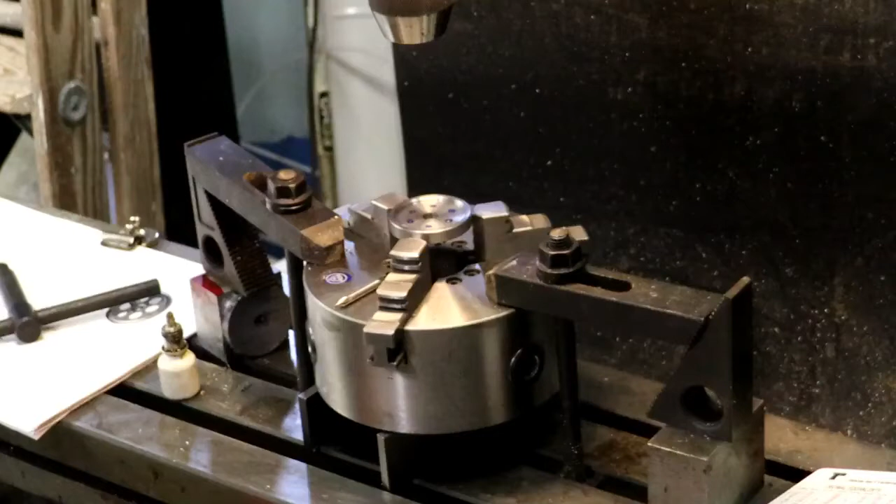Okay, been a while since I've been out here. Haven't been feeling really all that well. I have a doctor's appointment this afternoon to hopefully get my meds straightened out.

But anyway, working on the flywheel. And I already went through and marked, with a center drill, the holes that I'm going to be drilling in there, the hole pattern. But I'm going to show you on the DRO.

Okay. So I've already typed it in, so it should be in there yet. So I'll hit the hole pattern down here. And the first thing it's asking is the center of that hole pattern, which is 0 where we're at. So we hit it again. Oops. Hit the arrow down key.

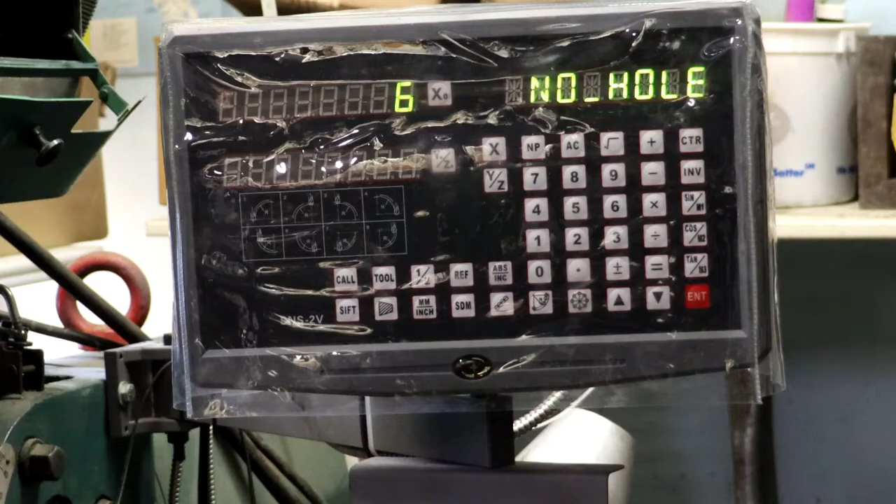And the diameter of the hole circle. And the diameter of the hole circle is 1.050 inch, which I have in there. And number of holes, 6 holes. And the starting angle, I'm just going to go 0.

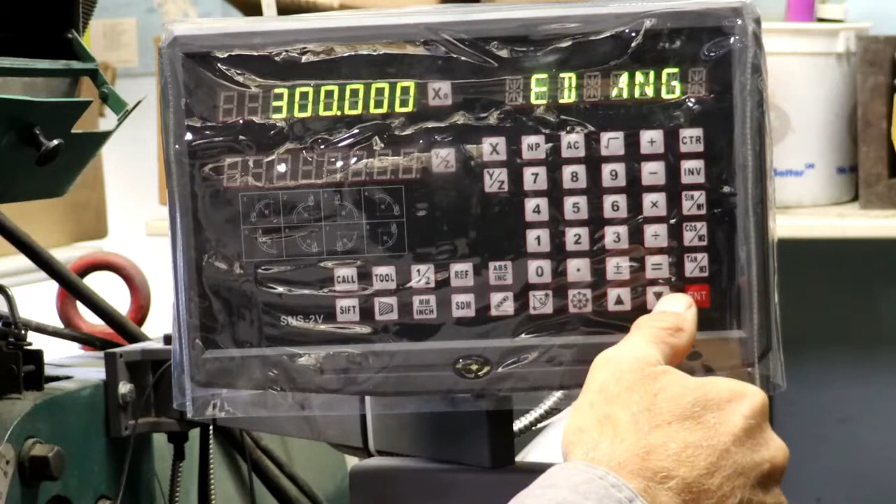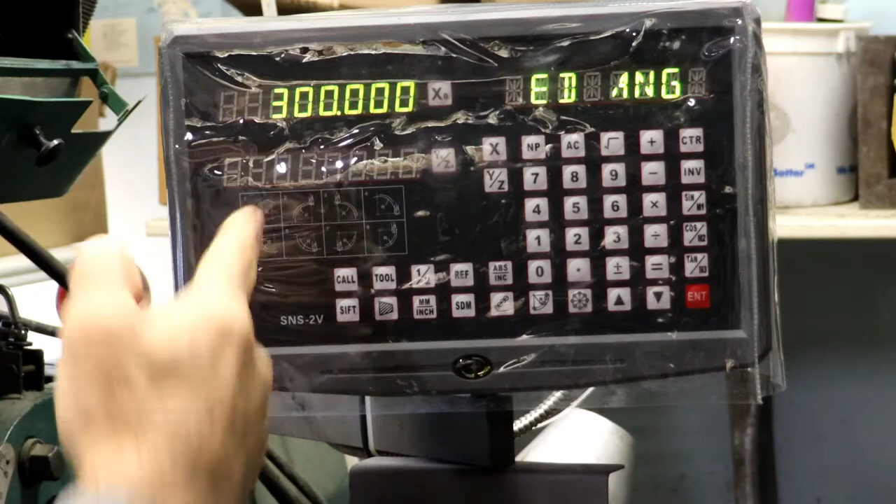And ending angle, you would take 6 holes, so that would be 60 degrees. So 360 subtract 60 degrees, because that's going to be our last hole. It'd be 300. Okay, and there's the number 1 hole.

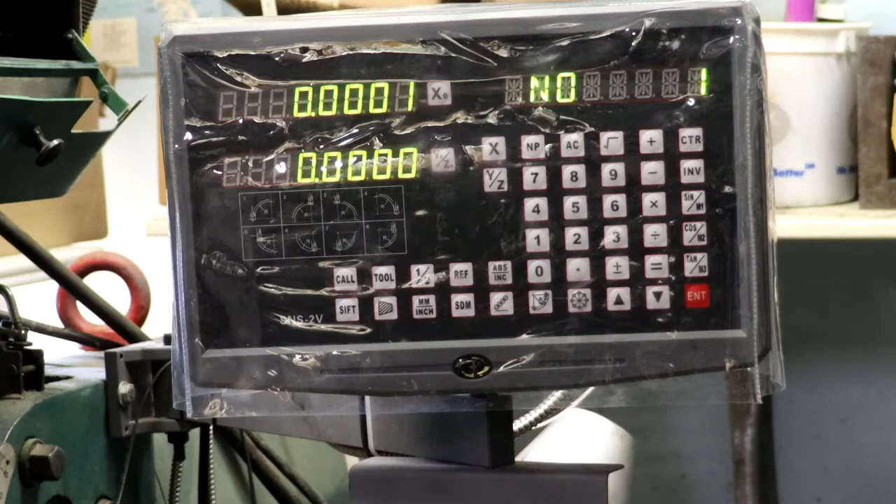We crank our X over to 525 thousandths. So what we do is we crank it over back to 0 here each time. So we'll crank that over to 0. Or close to. I see I bumped my Y. So I'll put my Y back to 0. Lock my knee, or lock my cross slide. Okay, so we're ready to drill the first hole.

And I turned my autofocus off. I'm just trying to focus it by hand.

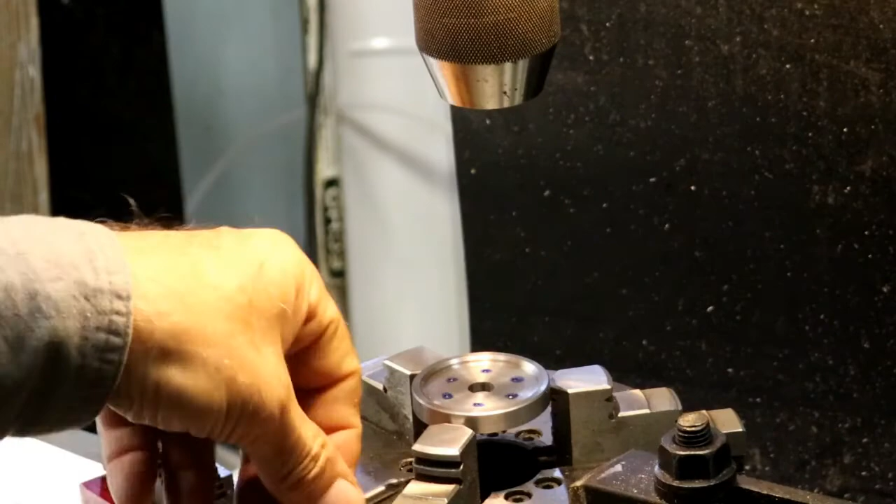And I'm going to drill a 437 diameter hole. I'm going to go in there with the center drill first and center drill that a little deeper. Maybe I gotta turn my quill stop down. And I'm going to double drill these. I want a 437, but I'm going to drill it probably a 1/4 inch first. We'll go ahead and drill that a 1/4 inch first.

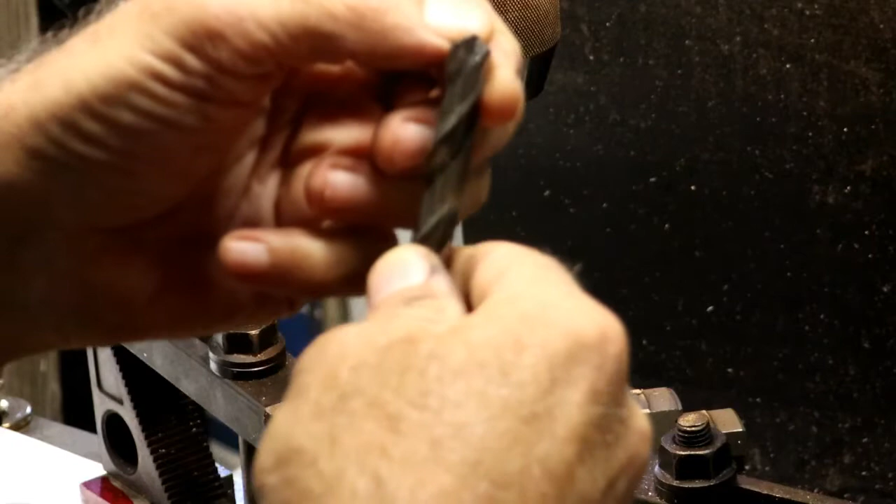Now one of these holes is going to be a 312, which will be the last hole. So now I want a 437 diameter. Seven-sixteenths drill, and guess what? I think I should sharpen that. I'm gonna quick sharpen that. A little dull. I'm gonna just hand sharpen it here, as quick as my grinder gets going.

Now I want to check it before I, and I don't think I went far enough. Need to go more. Dull. That corner of it broke down pretty good. Margin.

Okay, I think I'm going to shift it along here. I don't want to push the drill too hard. You'll see one flute is cutting a little bit more than the other.

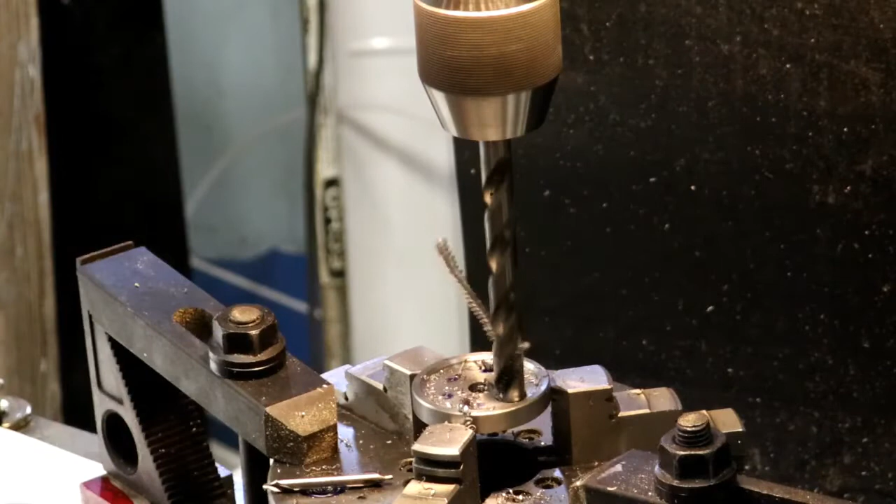And that's what I was checking with the scale, is the lip length on there, and if they're not both the same length, obviously the one that's longer is gonna cut a little more. But it's okay, we got through it, and yeah, we'll go to hole number 2.

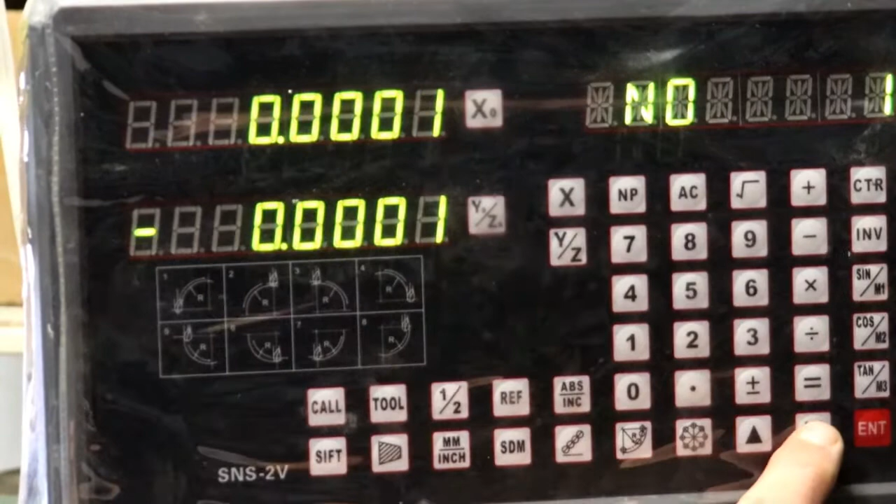So we'll go up under the readout here again, and we hit the down arrow. If I can reach it here. And then see the numbers changed. Now we got to put those back on 0. So we get down here.

This is kind of the first time that I've tried to just focus it myself without using autofocus. Hopefully I'm doing a decent job.

Alright, so Y we have to move it out, or in I should say, to 0, and then we got to move over 262. Right there. Shift back to high and do the next hole.

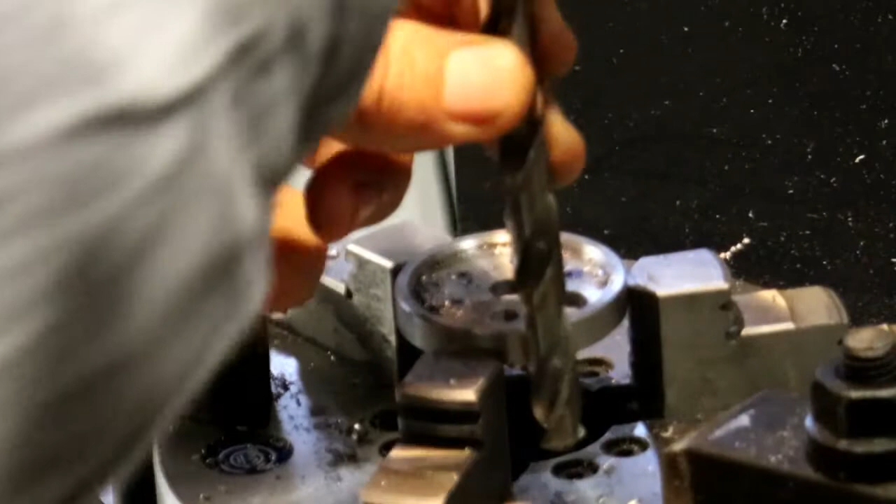And shift to low. My half-inch countersink would fit in here. Be nice if I could get a nice countersink on those. Let me check here once and see. I think I got it. I think I have one that's about a half-inch. No, I don't. I got one that's 5/8, which I don't think would fit in there.

All right, so I'll push the down arrow over here to go to the next hole. .524. Y does not move. Just move over on X. Pull my readout over here. Right there. And center drill. Then we'll shift to high. Quarter-inch drill. .437 drill. Shift to low.

And we'll push the button again, the down arrow to get to hole number 4. I've got to go 262 on X. And 454 on Y. Yep. Might help if I put that center drill in, clamping on all 3 jaws instead of 2.

I think the last time where I left off, I hadn't trepanned these out, but what I did was basically loaded it like this and trepanned the middle of it out on the lathe, so both top and bottom look the same.

I haven't been out here in a while. I started taking a double dose of my medicine. I'm hoping the doctor won't chew me out for it. I couldn't get the nerve pain under control. I have trigeminal neuralgia. Really, I'll tell you what, nerve pain in your head. You can't touch anything on your head, on your face, anywhere on your head. It sends you into a major pain episode. Puts you on your knees. Anyway, it does me. And then with the double dose of medicine, I'm kind of a little dizzy and shaky right now even.

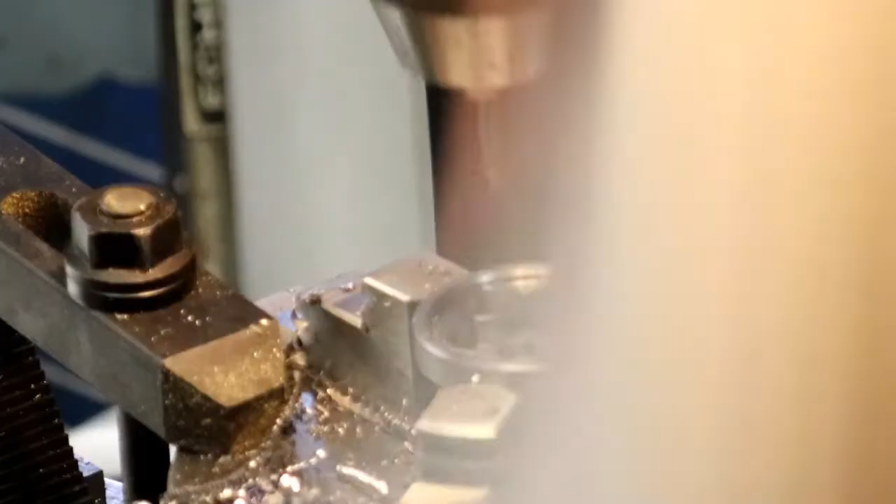All right, let's go to the next hole. Enough gabbing about that. All right, so 262 back on X. Oh, I got to move my Y. 455. See what I mean? That medicine does things to you. There we go. And then this will be the last 437 hole.

Next hole will be smaller, and that's to help balance out the motor, to balance it a little bit. Hopefully I got enough material there. If I don't have enough material there to balance the motor out, I can go back and open these up a little bit more. The Stirling engines have to be pretty well balanced, and also no friction. So I'm gonna be putting bearings in everywhere, and hopefully I can get it running.

Okay, that's the last one this size. The next one is a 5/16. So let's go to the next hole. Over 525. And my Y stays the same. And I'll double drill that also. I'm going to go with a 1/4 inch first.

And then I'll get a 5/16 drill, which is turned upside down and needs to be sharpened. It don't look too bad. I'm going to try it. Nope, it does have. I'm going to give that one a quick sharpen. This one isn't as bad as the other one. It's just out on the margin there a little bit that is dull. I think that'll do. The grinder sounds like an airplane taking off when I shut it off. I don't think I need to shift in the wheel. Good deal. And there it is.

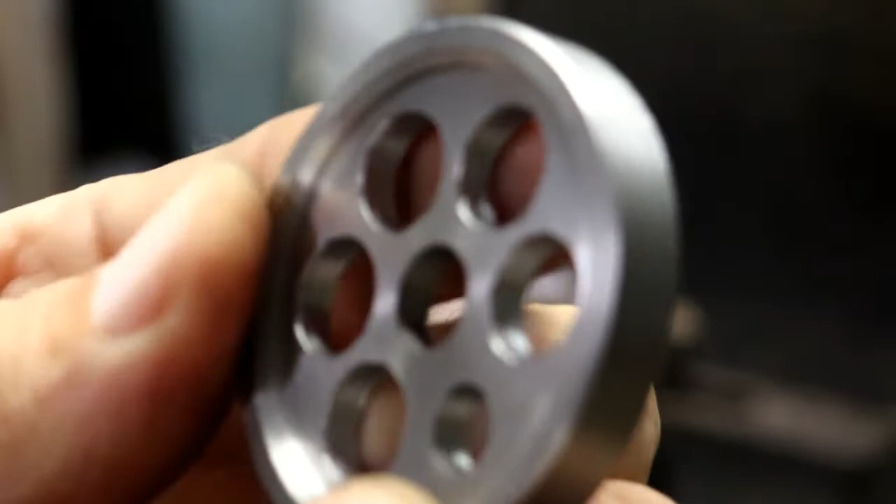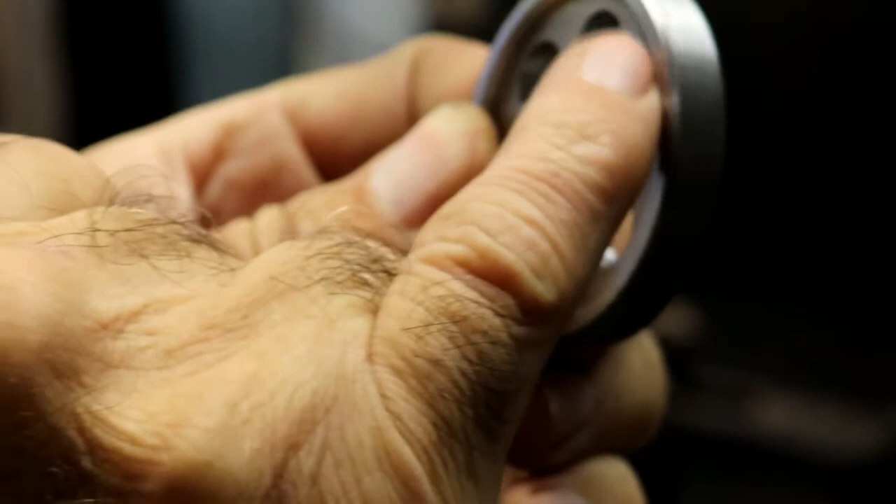Okay, so there is the first one. There. We'll give it a little spritz. And then see if I can focus on it up close. Like I say, I'll deburr the holes, and then the hub will get pressed in. The hub will have a little shoulder on it that'll press in up against the shoulder. And I'm thinking about polishing the rim up, and then copper plating it, and then nickel plating it so that it would be the hub, the sides of it, and the rim that I leave, and then the rest would be painted. So I don't know. I haven't decided yet.

But anyway, there's the first one, and we'll put the next one in there and see if I can do that without any events. Push the chips away. Couple parallels. Where did I lay it? Okay, where did you go? Oh, laid it over here on the lathe. Alright.

Tighten it up. Don't have to be real tight, but tighten up where you don't push it down when you... Okay. And that one's ready to go.

I'm going to go ahead and do that off camera, but before I do that, I want to try to explain something that someone was asking questions about. I'm going to try to explain it, but I don't know if I'll succeed or not, but I'll try. Move the camera around here and point down at the table, and back up a little bit. I might turn the auto focus on now. Alright, so

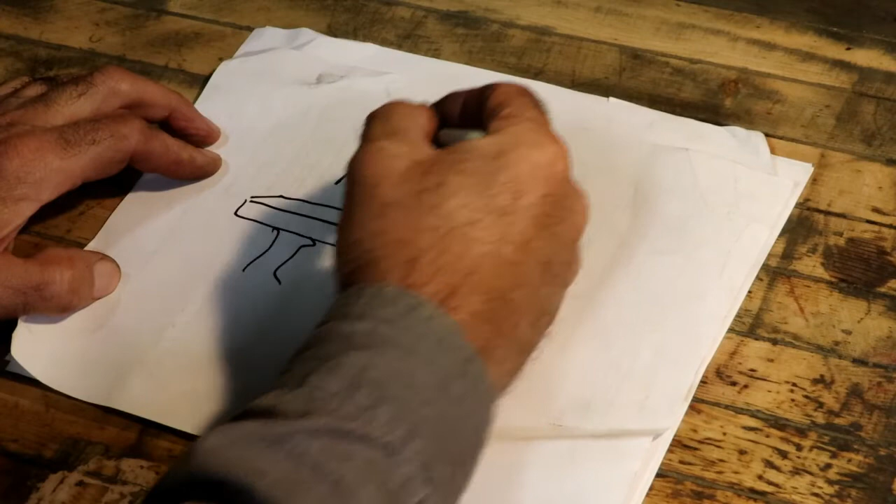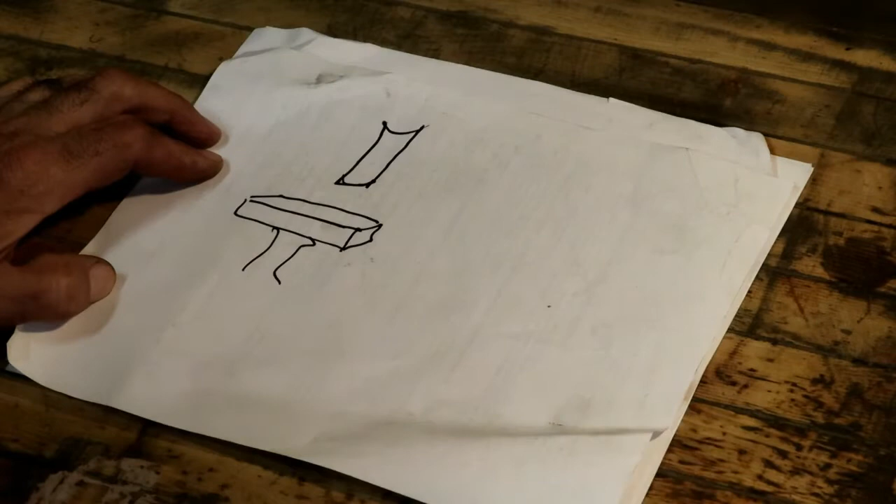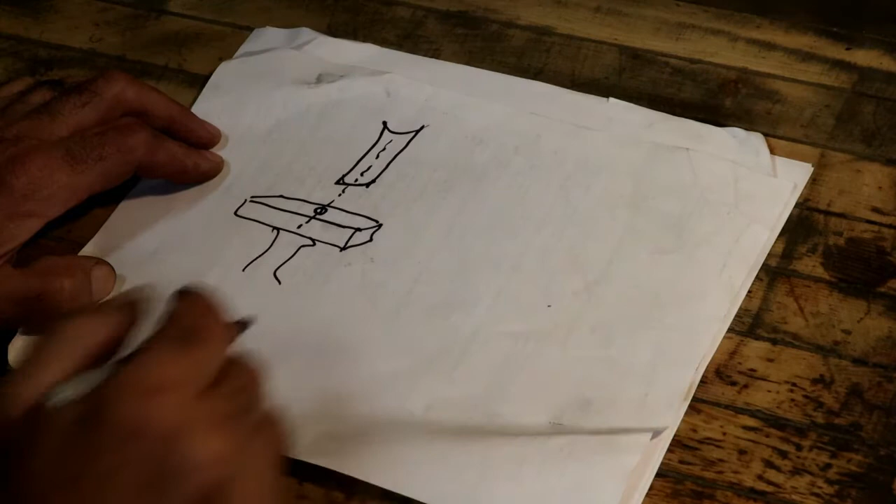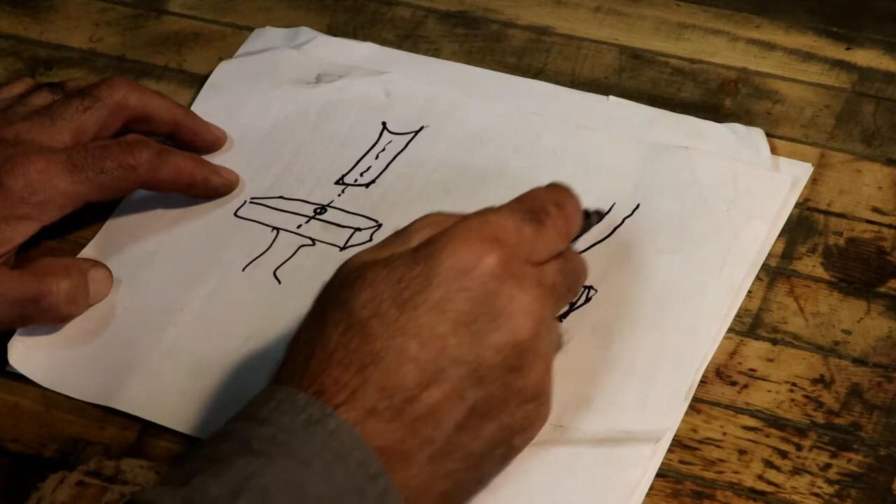Okay. So now here's your mill table. And say the quill was a thou or two off of being totally square. So here it is, it's on your center line, but now you moved your table down. Now this bushing is down here, or the hole is down here instead of up where it was at. You missed the hole.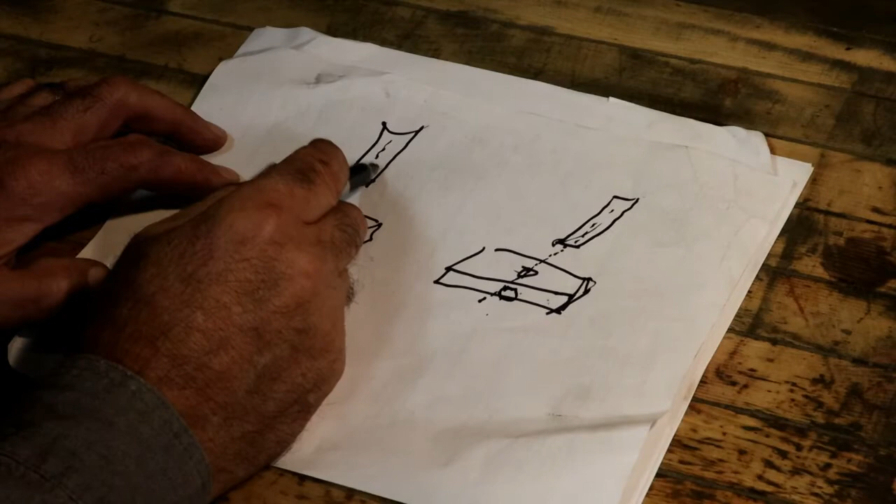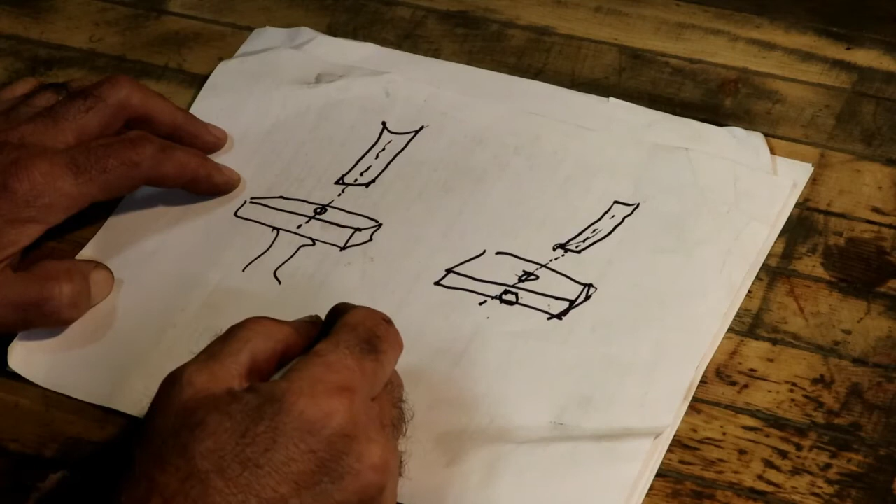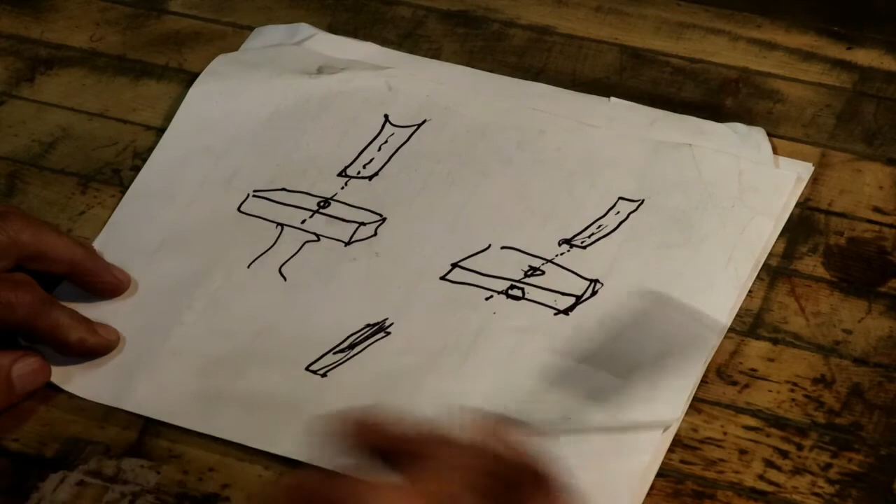So if you move this knee down, whatever you've dialed in, your tram would have to be dead nuts on. Dead nuts on X and Y, because the moment you move your knee up and down, you've lost your dial-in point. And even if your quill and spindle is trammed in dead nuts on, when you move that knee up and down, who says... camera shut off? But anyway, when you move your knee up and down and your quill isn't dead nuts on, and your dovetails that the knee rides on aren't dead nuts on, you're going to introduce error into your part. That's all there is to it.

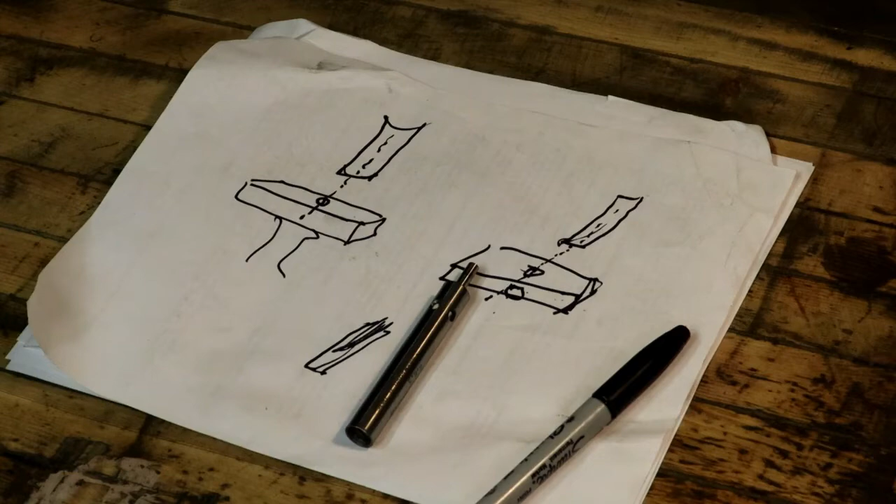Now, I watched an excellent video this morning. Michael Murray is his name. He did a shootout of an edge finder like this, like the edge finder that I use all the time. I use this a lot. And this is one that I built myself. I do have one that I bought that I don't use. It's got a different style light bulb in it. I wanted something brighter, so this one has an LED light in it, so that it lights up fairly bright.

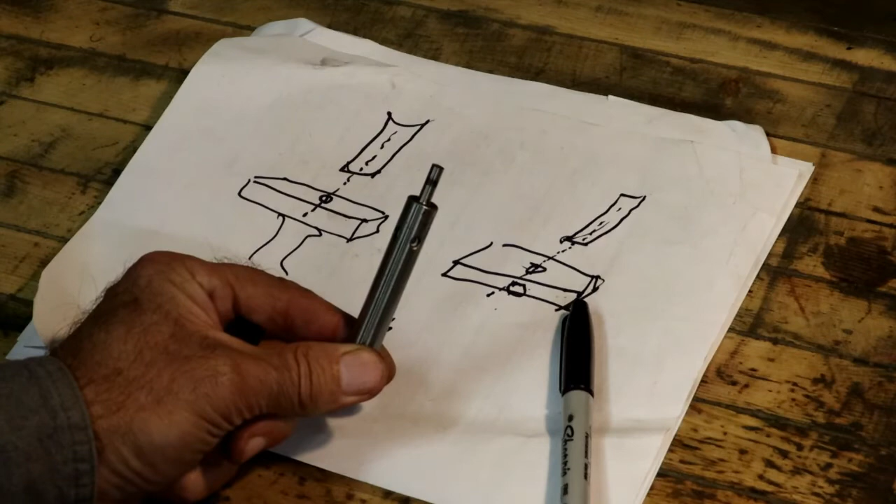But anyway, I know that this edge finder will get me within plus or minus 5. If I want anything closer than that, then I will dial in just the same way that Michael Murray does. He does an excellent video. Go watch it. He did a really good video on the accuracy of these.

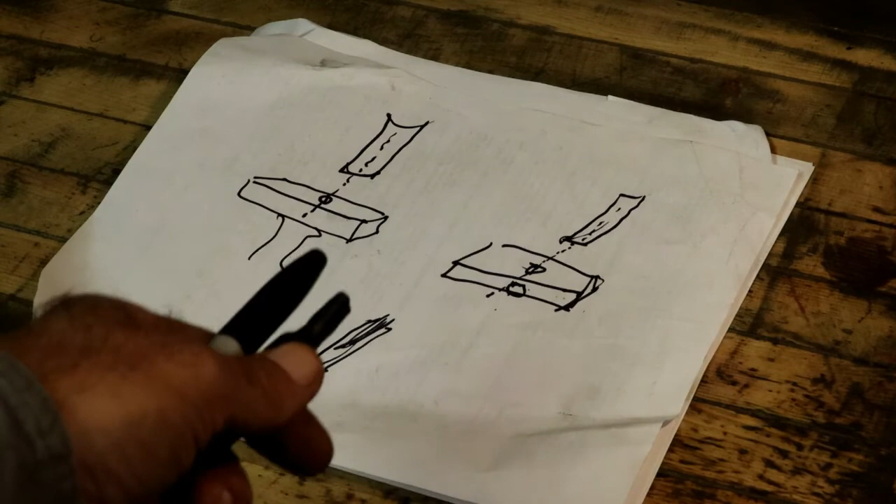So anyway, I'm trying to explain this knee situation, and I have a hard time doing that. But I hope you understand what I'm talking about. If your quill's sitting like this, and you dial in that hole, and you move this down, now your hole's not dialed in anymore. So your hole, whatever, your part, your edge.

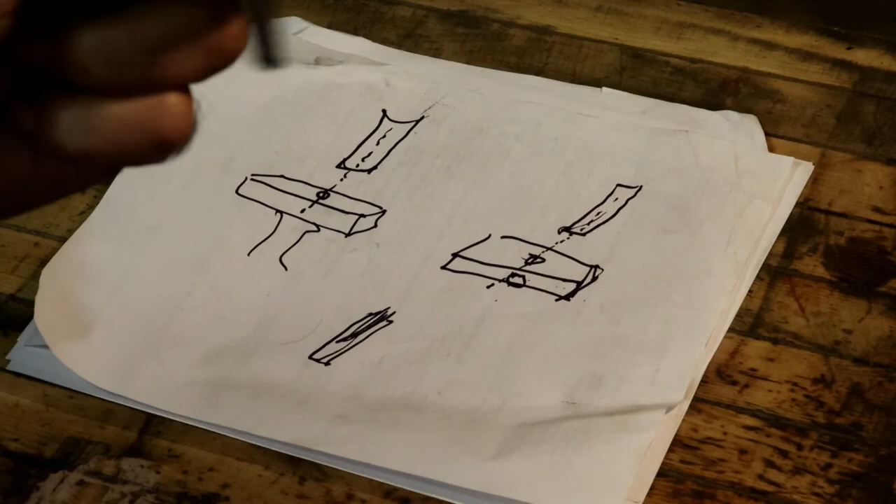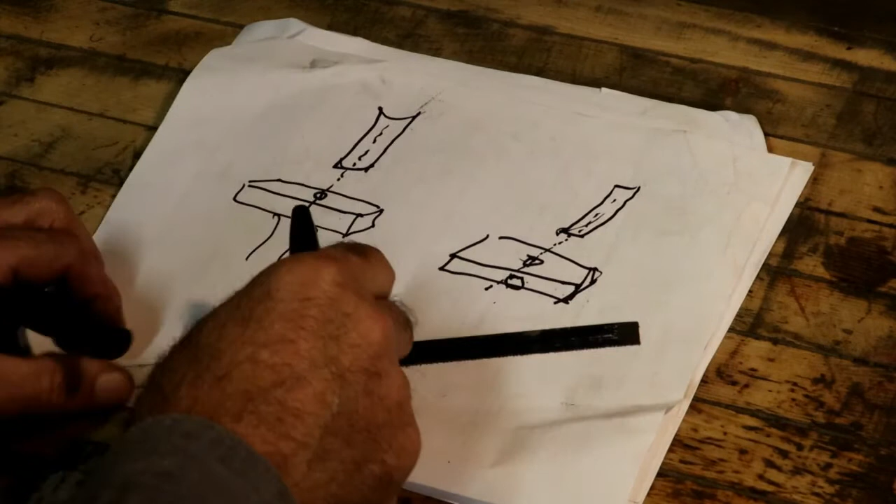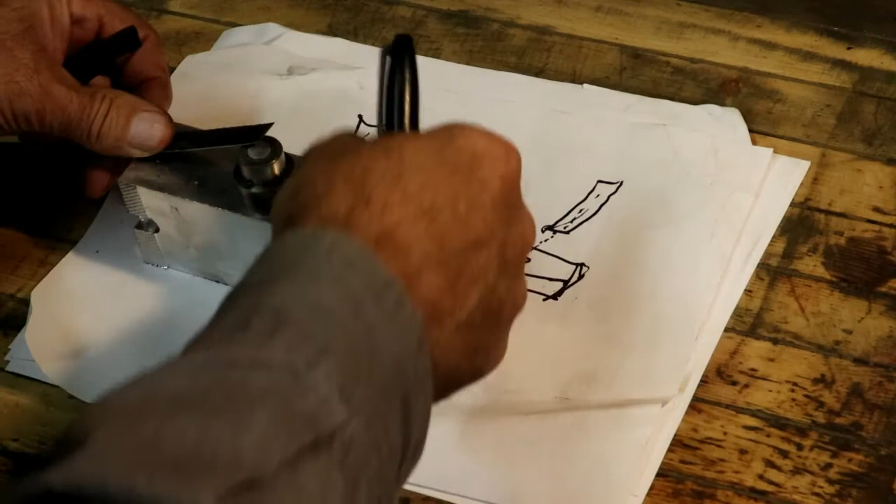But anyway, when I made these, I made a whole bunch of them, and I actually handed them out to buddies of mine at work. So there's a few of them floating around. I took that same concept over to my NC, and I made this height setting tool, and basically that follows the same theory. Say you're sitting on the material, and you come down, and your tool comes down and touches here, and it lights up.

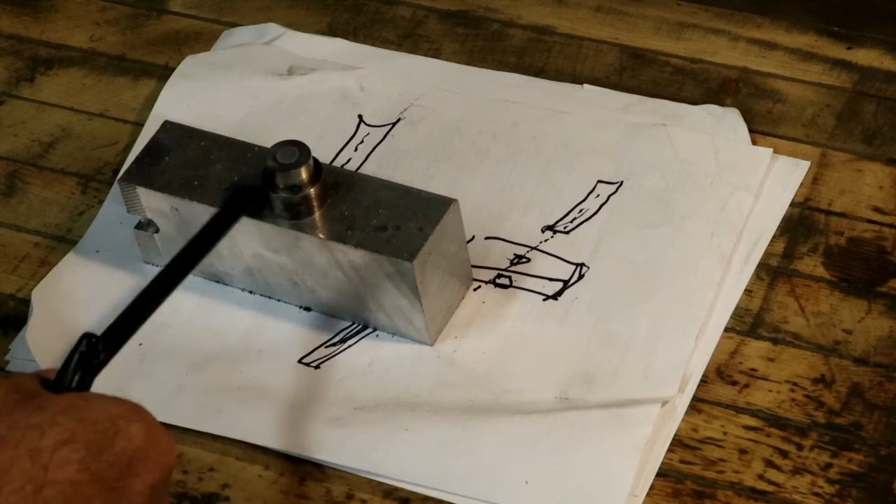The moment your tool touches that pad, which is spring loaded. I have the drawings and everything for this, so if anybody wants the drawings for that, just let me know.

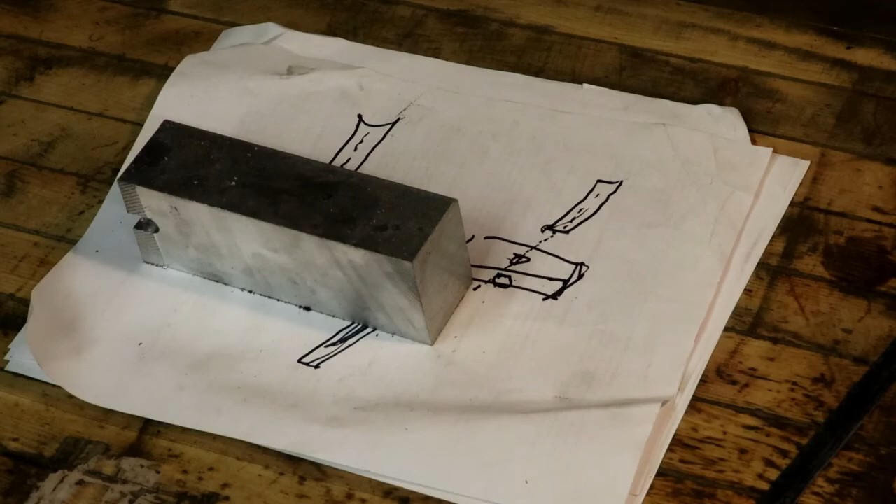Anyway, I am gonna go sit down and see if I can't upload this video, and then come back out and drill the other part here.

So, like I say, I haven't been out in the shop in quite some time. So, oofta. And my doctor's appointment is tomorrow, so we'll see what he has to say.